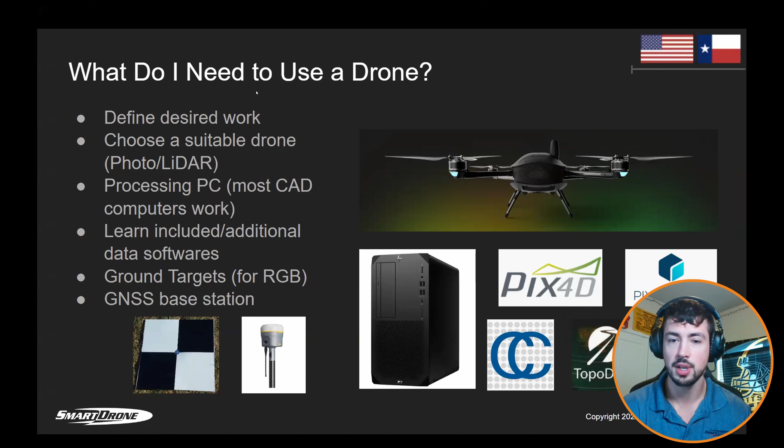Yeah, that's absolutely right. And while it can be a little bit of a learning curve, there's so many functions and features in it. It is a very powerful tool once you get your head wrapped around it. And of course, the fact that it's free and open source makes it very valuable as well.

The last two are Topodot and Global Mapper that we're just going to talk about right here. Both of these are ones that I don't have personal experience with, but some of our customers who have bought our units are using our exports and able to do some more advanced classification of data and things like that using these softwares.

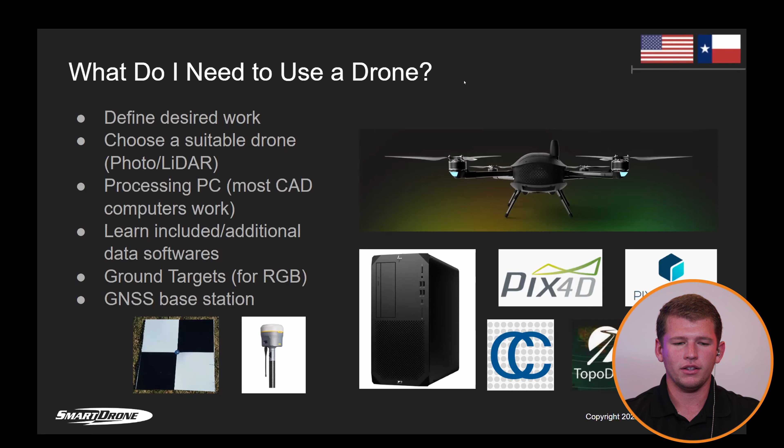Another thing that we're working on building right now is our knowledge base. So that's something you can find on the smartdrone.us website. And it's going to give you some instructions on how to use our drone, how to plan flights using our drone and our processor.

But we're also working on a section over third-party softwares and specifically how they integrate with our data. But I think you'll find a lot of that information is very general and can be used with a lot of different options when you're just looking for some more information or if you hit a roadblock in something.

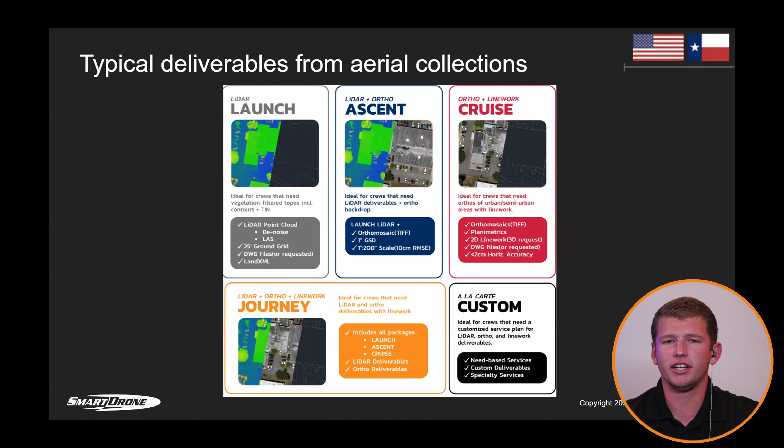Kris, do you mind giving us a quick run through of some of our typical deliverables and more specifically, how having different deliverables could help somebody that's getting into the drone world? Yeah, absolutely. So we decided on 4 different packages, each having their own deliverables inside of them, and we're finding that these are better options than just choosing one package that's going to include everything. You might not need line work. You might not need an ortho mosaic. And so that's why we've individualized each of these packages to be more custom for the customer.

But starting with our Launch, this is going to be your most basic package with just LiDAR to create your topo. Ascent is going to be LiDAR and ortho for you to make your own line work and create that 3D surface. Cruise is going to have both of those, but we're going to do the line work for you. We're going to go in and mark visually things that we're able to see from an aerial view, like parking stripes, road center lines, curbs, and then your Journey. I'm sorry, the Cruise isn't going to include your topo, but the Journey is going to include all 3 of those. We also have a custom package where if you just wanted line work or if you just wanted a topo, you could reach out to us for that and it would be priced accordingly.

But like Michael said, the reason that we've done this is to make it more custom for the client, to not only save them money, but to give them exactly what they want. Yeah, thank you, Kris. And the way this applies to you, if you wanted to start your own drone program within your business, or even as a private person, this allows a little bit more delineation between what it is that you can offer. And we found it to come in pretty handy.

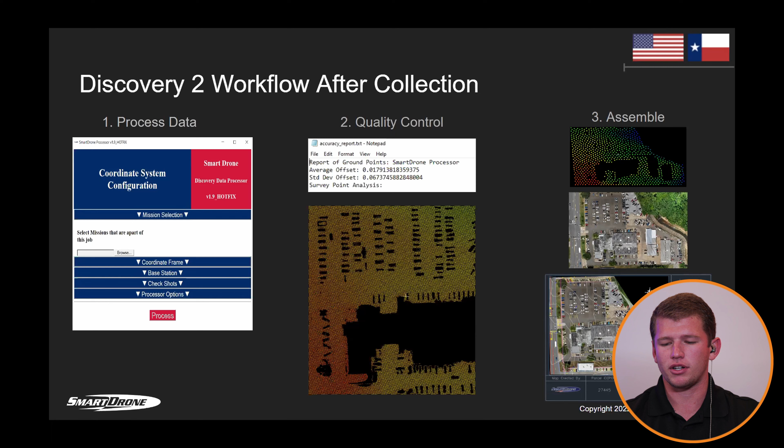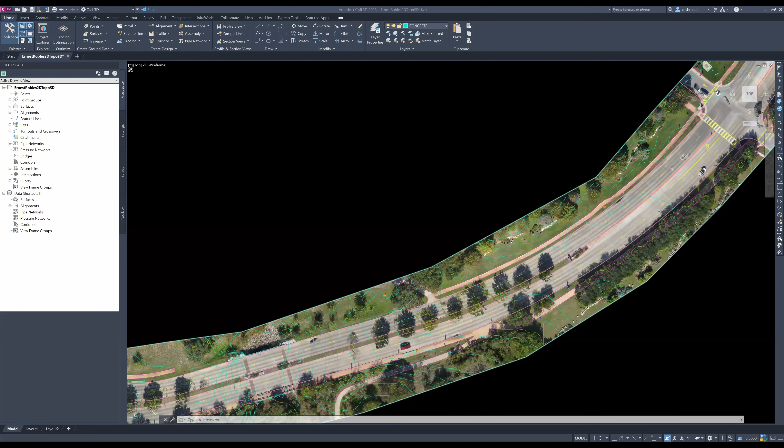Kris, I'm going to go ahead and stop my screen share here and we'll get the Civil 3D drawing that you have up and you can walk around a little bit into what you recently did for this client. Sorry, I was trying to unmute myself.

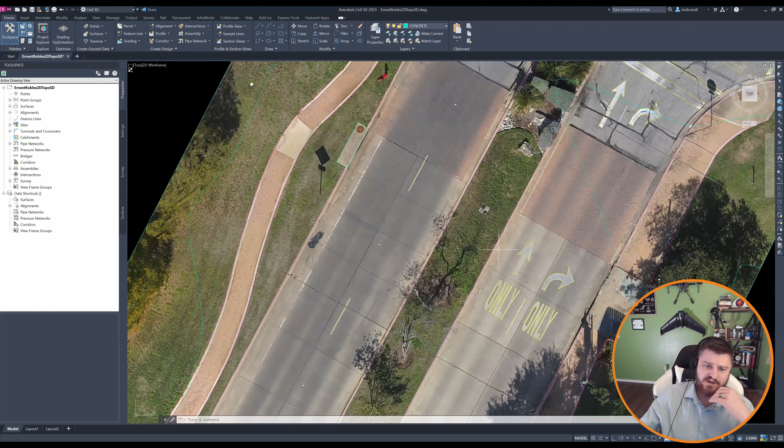So this is a job we did a couple weeks ago. We were hired out for the journey package. That's going to be LiDAR, ortho, and line work. Specifically, the client really wanted to see these cracks in the pavement to start planning repairs. But we were also able to get features marked like these pavement markings, our curbs, our sidewalk.

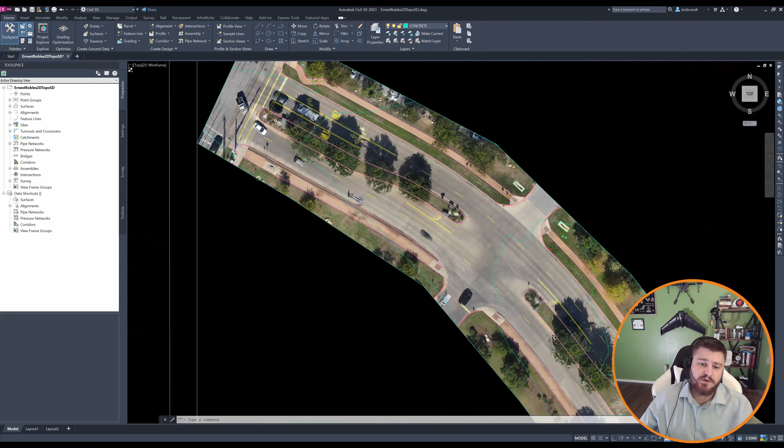So he really got the whole package and saved not only time in the field, but time that he could have spent on other projects. So this is going to be really the full enchilada. But this isn't specific to Civil 3D by any means. Any CAD software that you're working with, you're going to be able to work with our deliverables to not only produce this yourself or bring it in after we've made it for you.

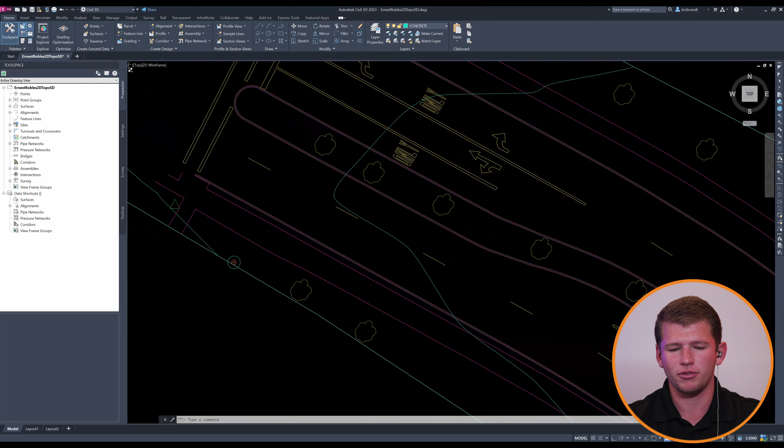Yeah, absolutely. And one of the concerns with this specific job, this was a job that Jesse flew, and then Kris went and drew the line work for us. It probably was safety, and correct me if I'm wrong, Jesse, but they probably didn't want people out in the intersection, using the survey equipment, and having to lock down roads for that long, or have people dodge cars. But maybe Jesse, can you share a little bit more about what they needed this for, kind of those cracks and everything, and why they went to us?

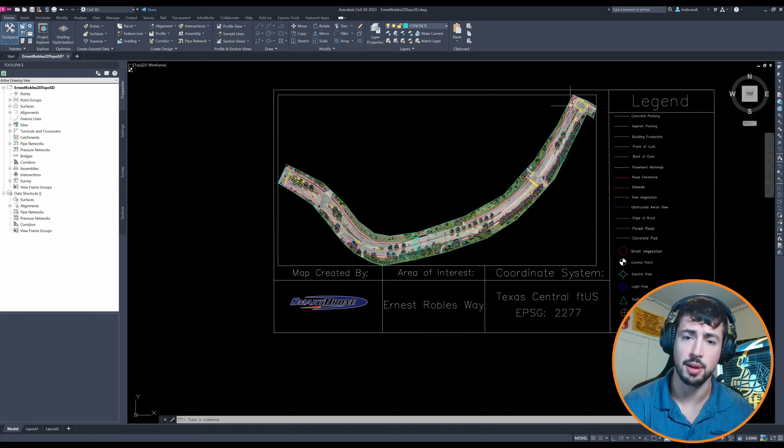Yeah, Michael, that's correct. The city of Austin was wanting to repair a roadway, and they didn't want to shut down traffic because this is quite a busy intersection. It was a shopping center adjacent to, there was a mall, a Home Depot, a Lowe's, a bunch of restaurants. So it wasn't very efficient to shut down the entire roadway. So I was able to fly.

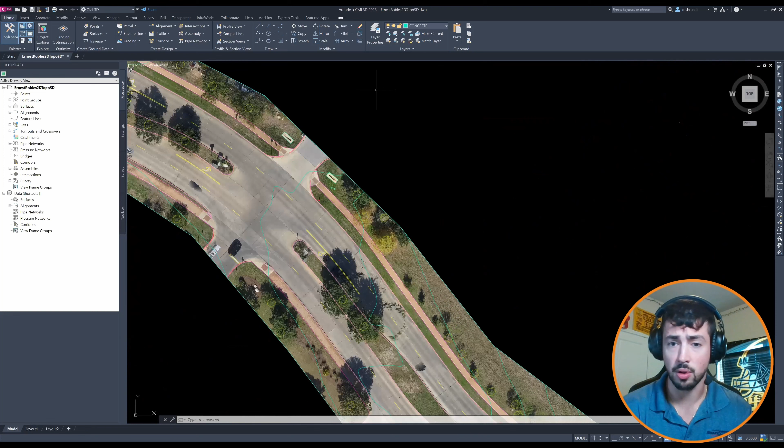Thankfully, the road wasn't too busy, and we were able to get the data that they needed without having the roadway shut down, without having crew members on the road gathering check shots to get this data. So they were very happy. They were able to get what they needed, save a bunch of time, and make the whole process safer. Yeah, thanks, Jesse.

Righty. I'm going to go ahead and share my screen back to this PowerPoint again. So our next section is on Discovery 2, but we do have a couple questions. Number one is for Jesse here.

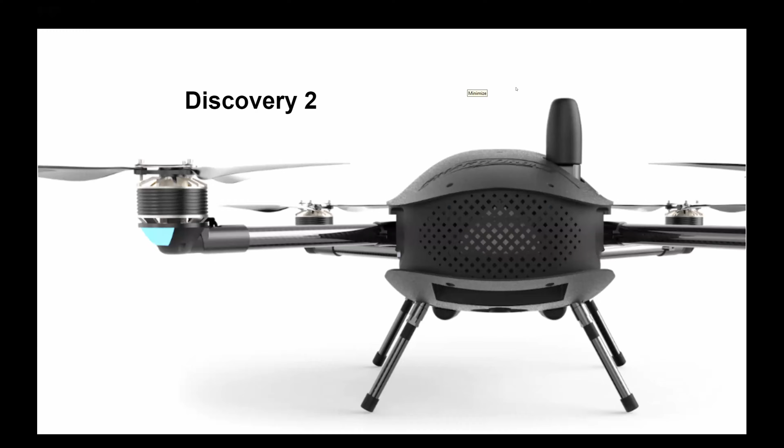So he says, Jesse is in Austin. What's with all the Steeler paraphernalia? So do you have any background there, Jesse? Hey, great question. Well, I'm from Pennsylvania originally, Central PA, enlisted in the Marine Corps right out of high school. And I've never let my team go, even though we're doing quite terribly this year. But moved to Texas after I got out of the military. And yeah, the Steelers banner will always be there. Hopefully it doesn't offend anyone.

And then we have another question from the same gentleman. And he says point cloud accuracy from photogrammetry has higher accuracy and density than LiDAR. LiDAR can penetrate vegetation where photogrammetry cannot. What advice, hardware, software, and workflows can you offer to give the best of both worlds? And Kris, do you mind starting off with this one, and then maybe I'll add my 2 cents if we get there.

Yeah, like he said, and he's totally correct. In wide open, flat areas, photogrammetry is probably going to be king. You're going to be able to get incredibly high density point clouds and accuracy out of there, working with that flat ground and open area. But like you also said with LiDAR, you're going to get that penetration into your high vegetation to hit that ground. Really, with our Discovery 2 drone, we're getting phenomenal penetration into the deep vegetation.

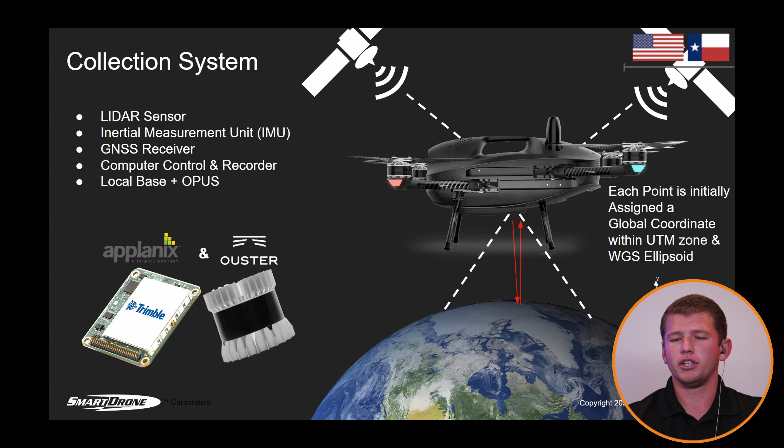Kris, can you talk about the warranty and what the maintenance schedule looks like on a Discovery 2? Sure. When you buy our Discovery 2 platform, it's going to include a 2-year warranty. This warranty is going to cover any single manufacturer defect during that 2-year period. We don't include any spare parts because of the way that the drone is all put together. The tolerances are very tight, and everything is calibrated to the installation specifications. So if there is a part that does need to be replaced, if you send it to us, we'll replace that free of charge.

And we'll want you to send it in every 6 months so that we can take it apart, put it back together, fly it, and revalidate it. Again, that's every 6 months for 2 years, and those maintenance tasks are free of charge, covered under warranty.

As far as what else you need to use the Discovery, you're just going to need what comes with the Discovery. That's going to be the drone, your batteries, and the controller, but you're also going to need your own GNSS antenna. Typically, surveyors and civil engineers are going to have their own antennas. Basically, they just need to be able to record RINEX observations to put into OPUS to get a good solution. Jesse is going to talk a little bit about how you're going to process the data once you finish your flights.

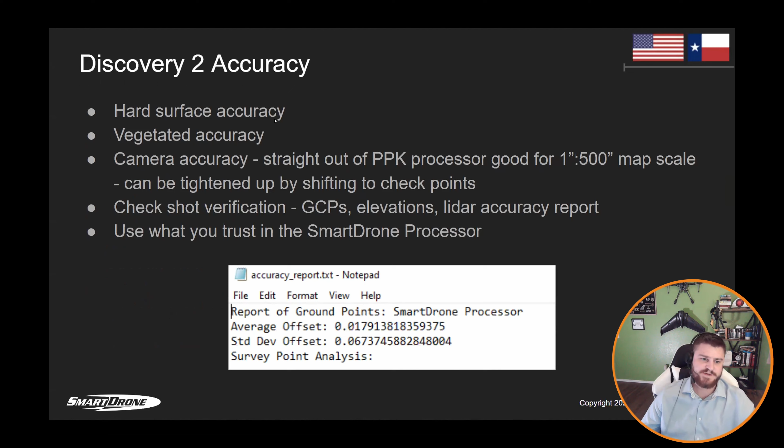Looks like we're running. So Kris, do you mind sharing with us a little bit more about what I talked about at that accuracy, and then what accuracy standards we meet with the Discovery product? Yeah, so like you were saying, it's a hugely powerful tool to better see your accuracy. We're inputting our ground truth check shots that we took out in the field, and it's going to compare it against the LiDAR data coming out of our processor to give you your RMSE value on your Z axis. We're finding that in open areas, we're meeting and exceeding the ASPRS standard for half-foot contours. And in more vegetated environments, we're still meeting our standards for 1-foot contours.

So this just gives you a better idea of your data to give you more confidence in it. But like this last line says, use what you trust in the processor. So good data in, good data out, and vice versa, bad data in, bad data out. So we want to make sure that what we are putting in is accurate data for it to verify off of. Then we can start using our raw outputs from the processor, such as our point cloud.

Michael, if you want to talk about the data classifications and file types. Yeah, absolutely. And just to add on that, this RTK equipment and everything, we found it to be extremely accurate. And so if we can make good mathematical equations and say, oh wow, we actually line up very closely to these RTK shots over the course of the job, we found that helps us and also helps our customers feel comfortable using our data on their job sites.

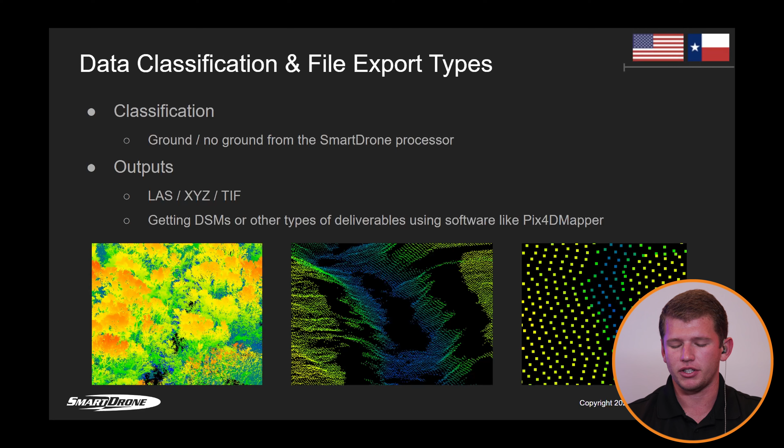As far as the cost of the processor goes, oh, this is me as well. So the cost of the processor is, of course, included with the Discovery 2. That's one thing that we believe sets us apart from the market, is that we include a perpetual license with unlimited self-service use on your local machine when you buy our Discovery 2. It's going to classify ground and not ground, as I've mentioned, and it's going to generate those outputs. And we always recommend, for our processor and for others, that for quality control purposes it's absolutely necessary to go through that data manually and make sure things line up to what you saw when you were out on the job site.

Pix4D Mapper is excellent for creating those full photogrammetric results that we've been talking about, and it's usually a little under $300 a month. And Pix4D Survey is excellent for working with those very large scale LiDAR jobs. We're talking hundreds of acres where you really don't want to go through it manually as much. It's going to allow a much faster workflow.

And then Cloud Compare we always recommend. Some things Pix4D Survey is not going to be able to keep in, like sharp hills, with its automated system. And Cloud Compare is a great way to come in, do a final sweep, and bring in some of those things you had to manually cut if there were strange shapes, things that automation doesn't deal well with. And the best part about that is it's free to use. It's open source.